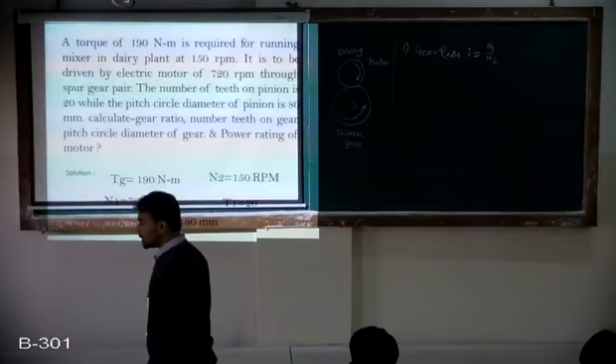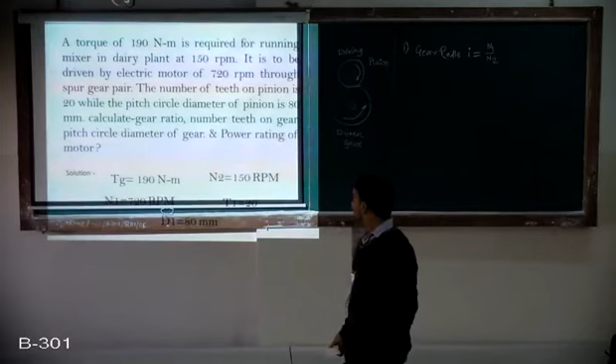A torque of 190 Newton meter is required for running the mixer in dairy plant at 150 rpm. It is to be driven by electric motor which runs at 720 rpm through the spur gear pair. So it's a type of numerical spur gear pair. The number of teeth on pinion is 20, while pitch circle diameter of pinion is 80 mm. Calculate gear ratio, number of teeth on gear, PCD of gear and power rating.

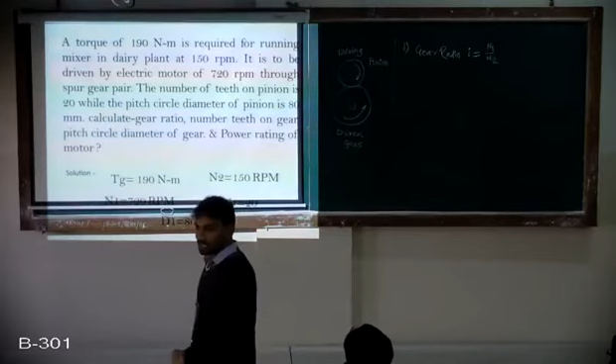So first read this technical numerical carefully. Torque of 190 Newton meters. Try to understand: what is the speed of motor? 720 rpm, right? What is the speed of machine? 150. So is it reduction? Yes. So in this case also, pinion is connected to the motor shaft, is it? Yes. So first read the numerical carefully and then go for this arrangement.

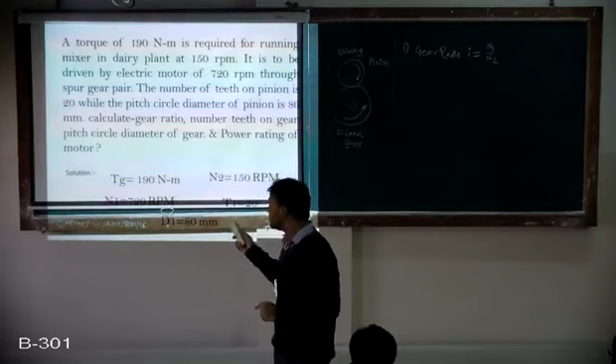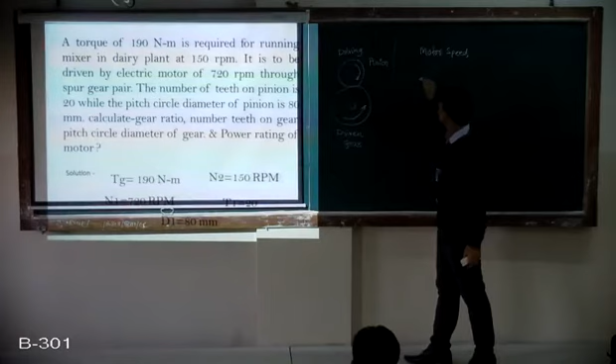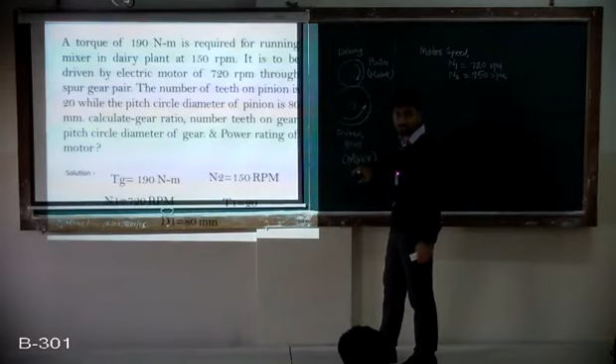Now motor speed, so first I'll write the given data here. Motor speed, that is the driving side, pinion. So what is N1? 720 rpm. Next N2, speed of mixer, it's like the application they mentioned, it's like the output shaft, so that's the driven side. Here you can write this mixer in dairy plant, and this is input from electric motor. Now this is 150 rpm. So N1 is 720 rpm, N2 is 150 rpm. This is the arrangement: from motor, pinion that's driving side, mixer as application with reduced speed connected to the driven side, right?

Next, number of teeth on pinion. So what is given? Number of teeth T1 on pinion, let's say one parameter. So number of teeth on pinion T1 is 20. Next, what is given? Pitch circle diameter, for which given? It is given for pinion, so that is also D1. So D1, PCD of pinion, pinion means D1, it is 80 mm. So this is the given parameters.

Simple formula again, same. First, what do you need to find out? Gear ratio. So gear ratio I equals N1 upon N2. N1 is 720 by 150. So gear ratio is 4.8. First answer, N1 by N2. N1 is motor speed 720, mixer runs at as machine 150. That is 4.8. First answer.

Second, what is our second? Number of teeth on gears. So same, I equals T2 by T1. I is 4.8, T2 is what we need to find out, T1 is 20. So number of teeth on gear is 96. Next, second, just 4.8 into this. Third, very important, power rating.

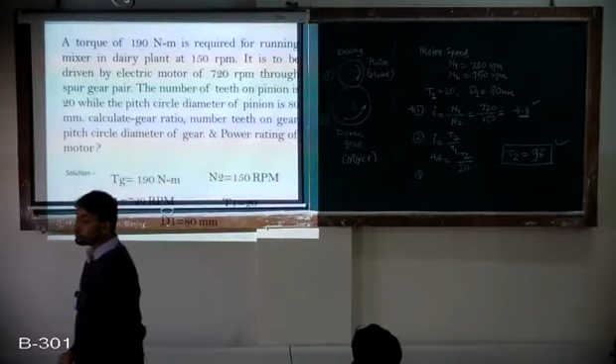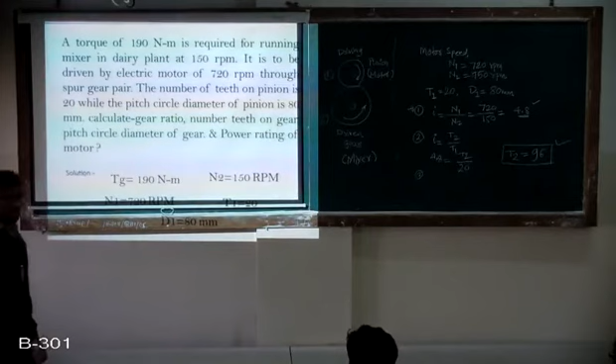Now to go with this, first line: a torque of 190 Newton meter. I guess this part is same as previous numerical, just the calculation differs. A torque of 190 Newton meter required for running the mixer in dairy plant. So now this torque is on which side? Electric, okay fine, this is electric motor driving side, connected to mixer plant, the driven side. So the statement is a torque of 190 Newton meter is required to run the mixer. Mixer means this shaft, driven side. So torque on which side is given?

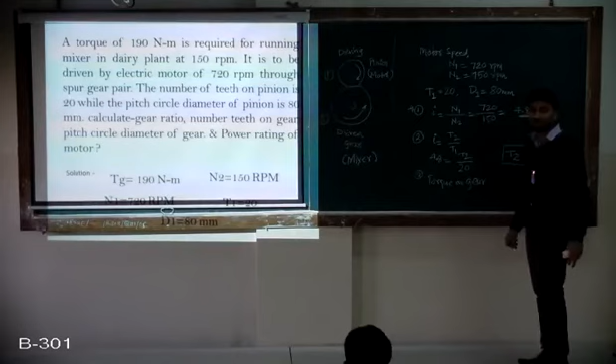Driven side. So to avoid confusion of 1 and 2, I am using notation TG, because we are using T1, T2 for number of teeth. So very important, torque on driven means gear is given, not pinion. Am I clear with this? Torque on the gear, so TG is 190 Newton meter.

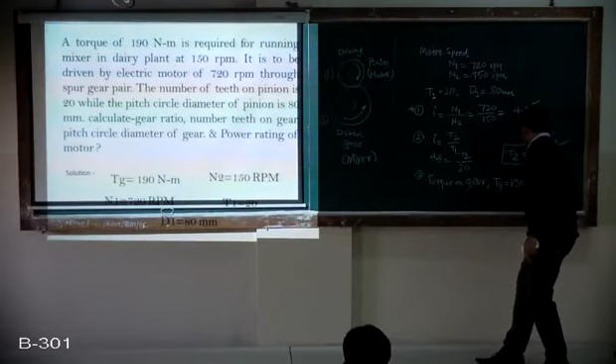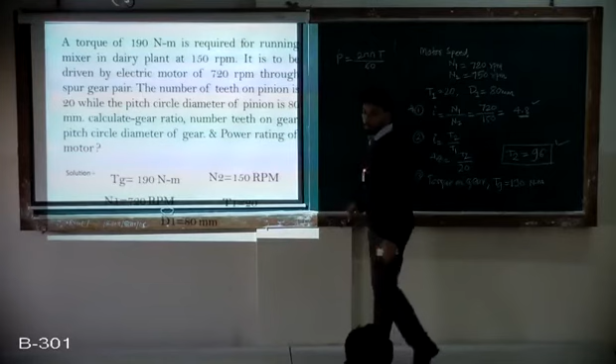So how can you calculate power? What is the power formula? Yes, so P equals 2 pi N T by 60. If N is in RPM, you should take this 60, right? So you will get answer in watt, if this unit is Newton meter. Very clear SI unit: if it is Newton meter, then only you will get answer in watt.

Now, point of discussion here starts. In this case, what is given? Torque on driven side, means on gear side, is it? So what N should I take, N1 or N2? That's the discussion, because if you take N1, that is something different, if you take N2, it is different. What is power? Speed into torque, omega into T, right? So if you are talking about driven side, you should take speed of driven. You should not take N1 here, it is N2, driven side. That's the gear speed. Clear?

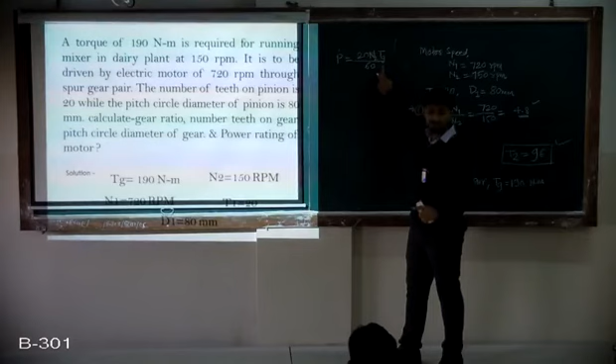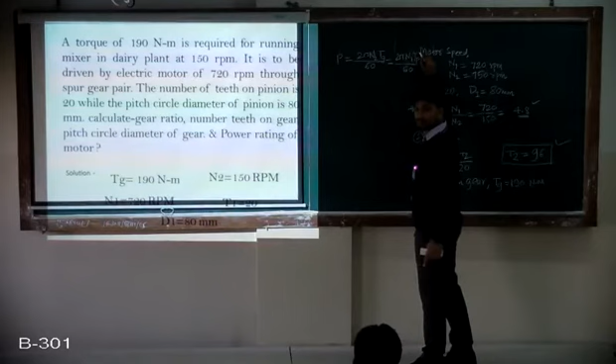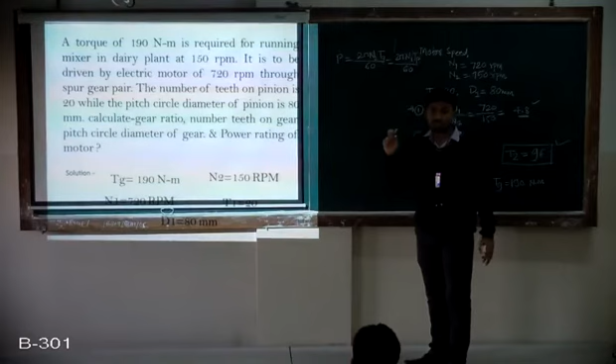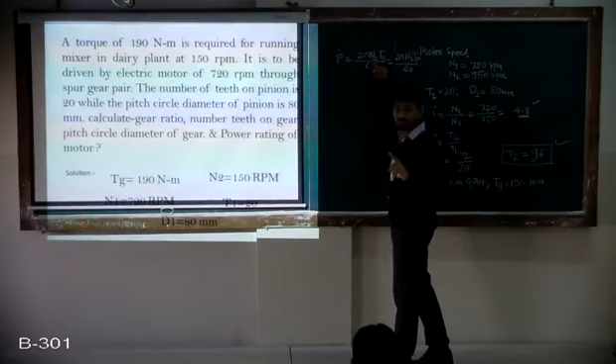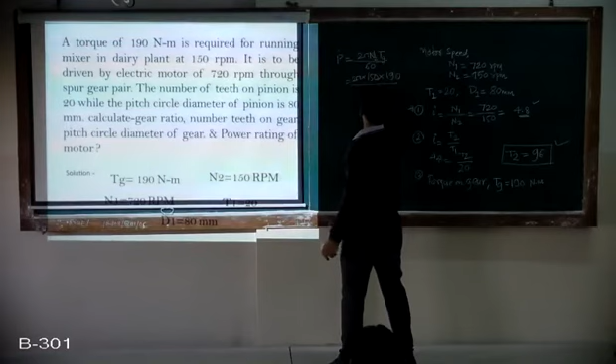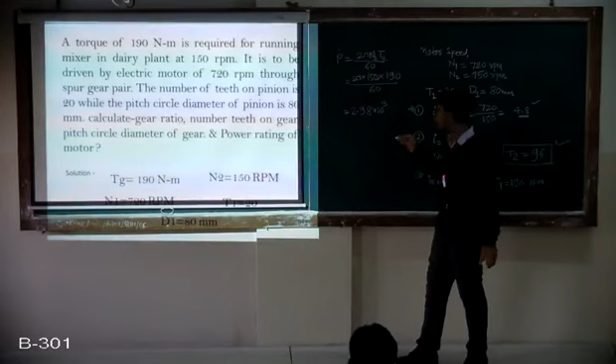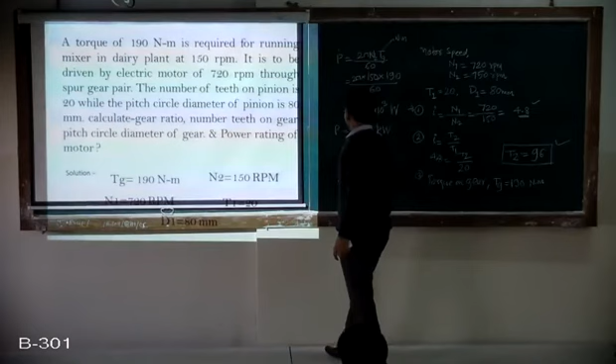Clear? So in this case we don't need to worry, we just need to calculate power. So 2 pi, what is N2? 150 RPM, torque is 190 Newton meter, divided by 60. That gives 2.98 into 10 raised to 3. Now what will be the unit? Watt. Remember, torque should be in the unit Newton meter to get answer in watt. Now if I eliminate this, it's 2.98 kilowatt. So that is power, or approximately 3 kilowatt motor. So that is the electric motor power rating, that is 3 kilowatt.